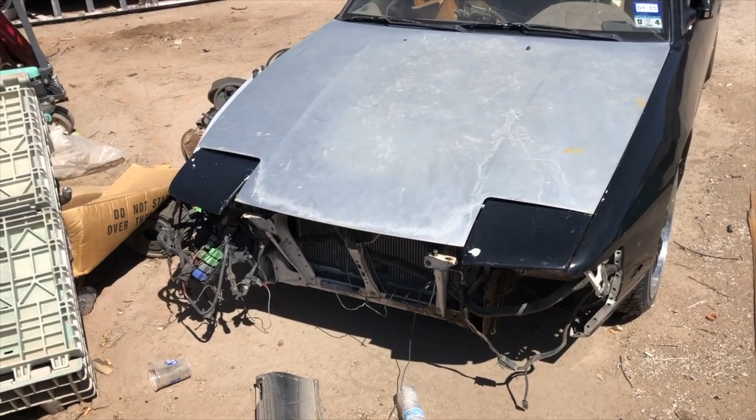So here over at EP Motorsports, got to take a look at a bunch of their vehicles they had. Man, they had some nice little toys in there. It had a Supra, had a RX-7. They had a whole bunch of 300ZXs. It's about to switch to a shot. Oh man, there was a S14 sitting out there, just chilling outside. Looks like they were planning to do some work on that in the future. So I mean, there was some really cool toys there. I was really impressed with what was going on there.

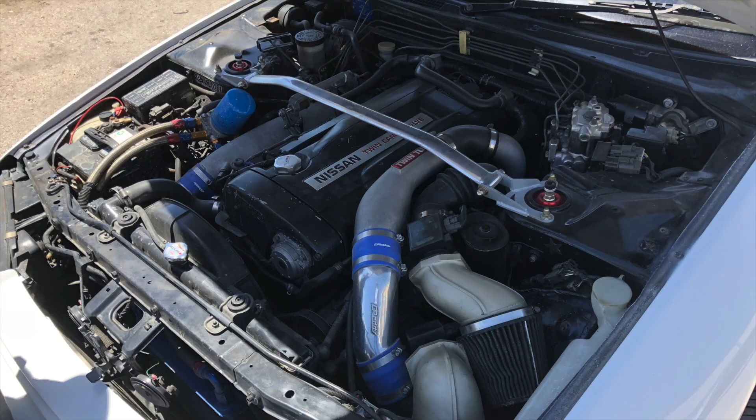And then what was the craziest thing was halfway through the tuning session, look what ended up showing up. Give it a sec, and here it is. You know, this nice R32 Skyline. Man, that thing was awesome. And so you know, some really nice stuff, nice toys out there. But let's get to business. Let's get down to what we're here for.

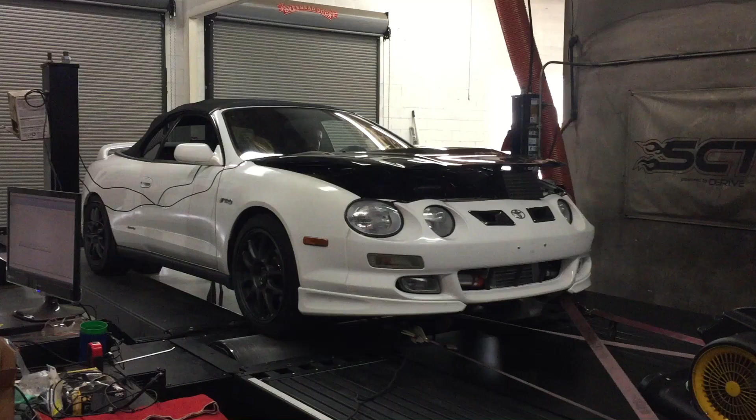Now I had this Celica tuned multiple times and dynoed multiple times, so kind of give you a little highlight of what's going on. So here's a shot over at Hammer Performance. This is when I had the 3S-GTE recently installed, this 4th gen 3S-GTE, and running off the stock ECU. And here's the dyno pull that happened with that. Yeah, so pretty respectable numbers. You know, I was pretty happy with those for the stock ECU, stock turbo.

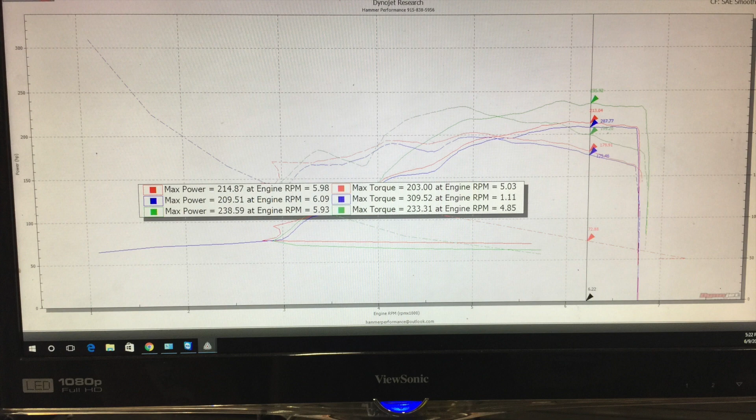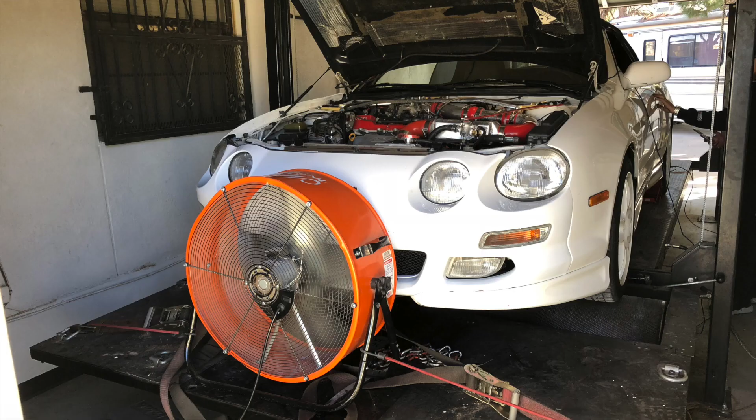Once I had a good baseline, I was like, hey, now let's throw this standalone in here. So I ended up throwing an MS3Pro EVO in there, and then taking it to another local tuner. Here's a shot of it on the dyno. Sorry I don't have any live footage of it, but yeah, it was a pretty good tuning session there, and I'm getting some good numbers, and here they are right now.

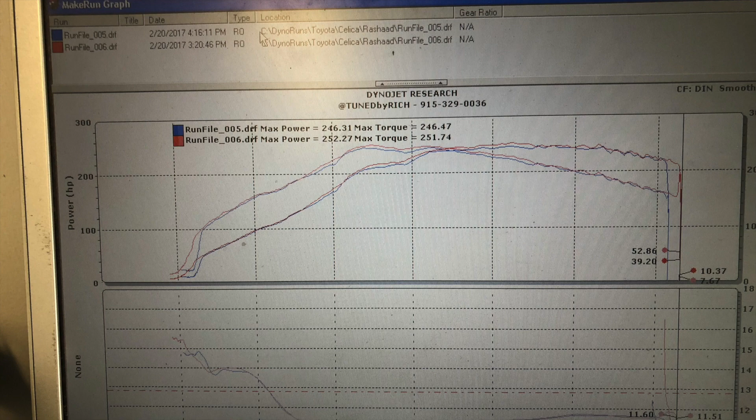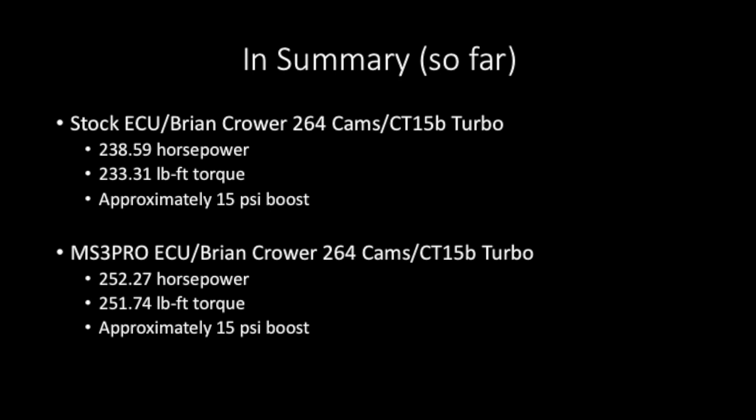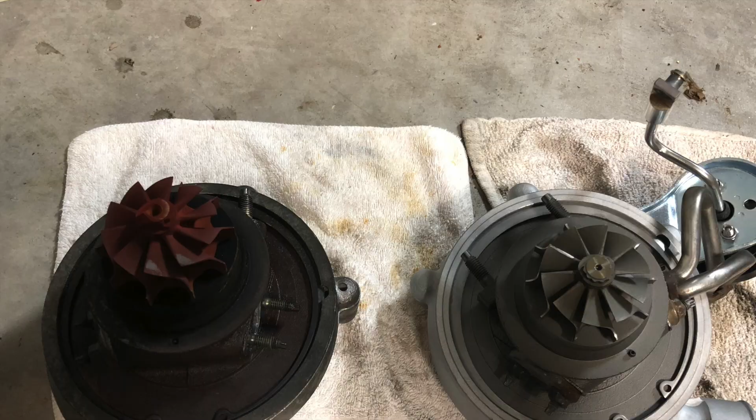So in summary, this is how the car previously performed, and I was pretty happy with those numbers, but I was still looking to push it. There was still a little bit more I could do with it, because you know, 252 horsepower, and I've seen guys go way beyond that with this 4th gen 3S-GTE motor. So I was like, what can I do next? And what I thought of was a turbo. So what I ended up doing is hitting up ATS Motorsports and getting their CT15 upgraded turbo. It's called the Sweet 16 billet wheel, and hopefully that'll give me a little bit more power. So now that I've kind of gone through to where we are at this point, let's start tuning on 91 octane.

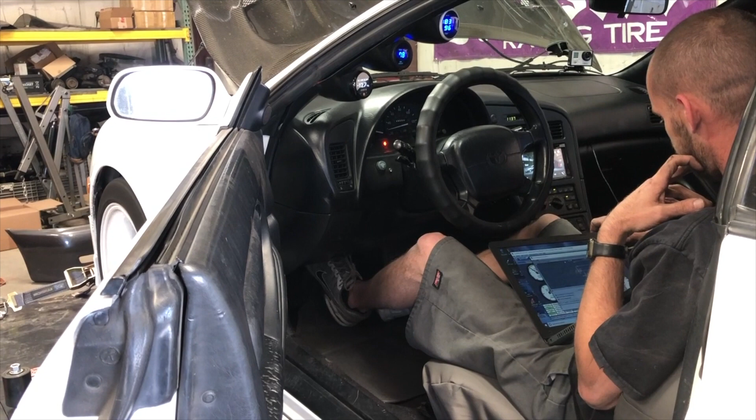So this is the tuner, kind of getting a feel for the tune that was on the car before he did his first baseline pull, so you can kind of get an idea of where we were standing walking into there. And all I had done with it at this point was pretty much fattened up the map a little bit, just because I had that bigger turbo, but really hadn't fine-tuned it or anything. So here, let's see what's going to happen. Here's the first baseline pull. So 283 horsepower, 274 torque. Man, that's just baseline. Where's it going to go from here?

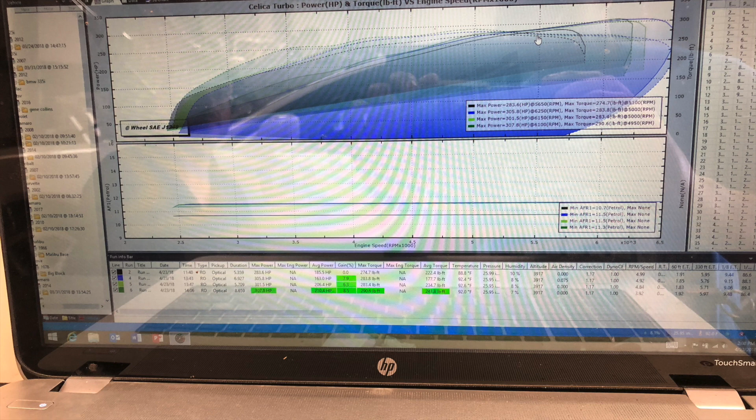So we got two final pulls here, and I kind of wanted to talk a little bit about this, because if you look, the first one's at 307 horsepower, second one was at 305. The 305 is what we ended up going with, because the tuner went through the logs, took a look at everything, and we were getting a little bit of knock, a little bit of detonation up at that 307. So he messed around with the timing, messed around with the fuel a little bit, and he got it to where it's really nice and it'll really be a good, solid tune.

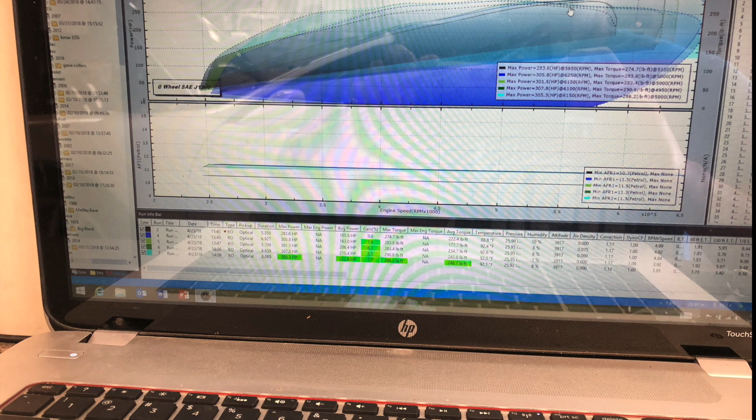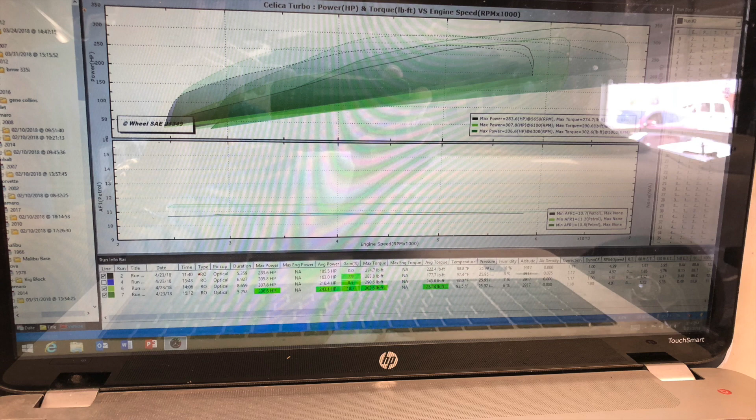Now it's time to tune on some E85. This was the first pull done on E85. And this was the final pull done on E85.

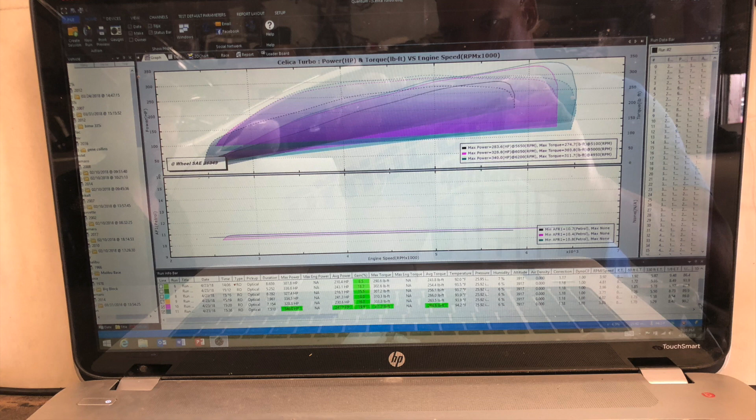So just got back from my tuning session. Man, they made some really good changes. Looks really good. Car feels amazing. I'll be putting up the horsepower numbers. You guys should see that. But man, I'm real happy with it. They messed around with the timing maps a little bit, mostly got things changed in there. So I think they cleaned up the map and got me exactly where I need to be. So I'll get some pulls as well and some driving as well, showing you guys how well it's doing.